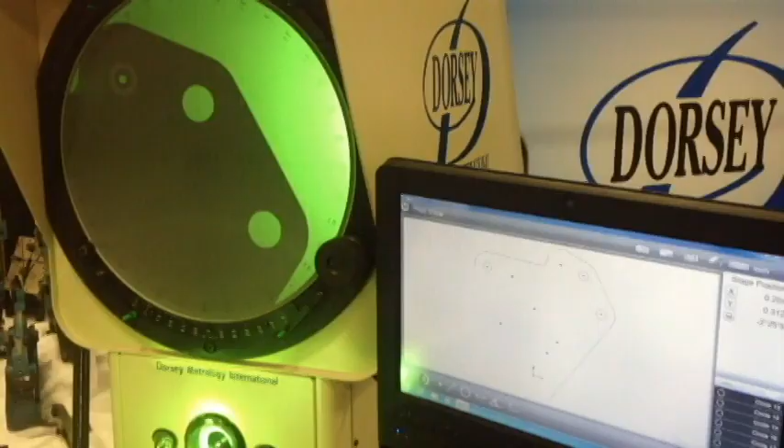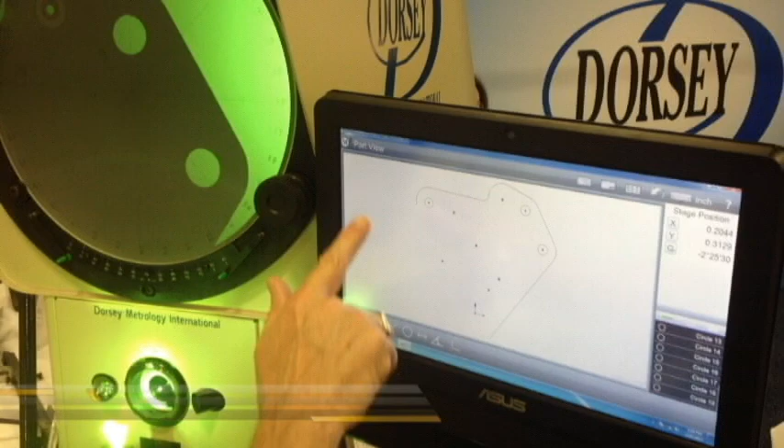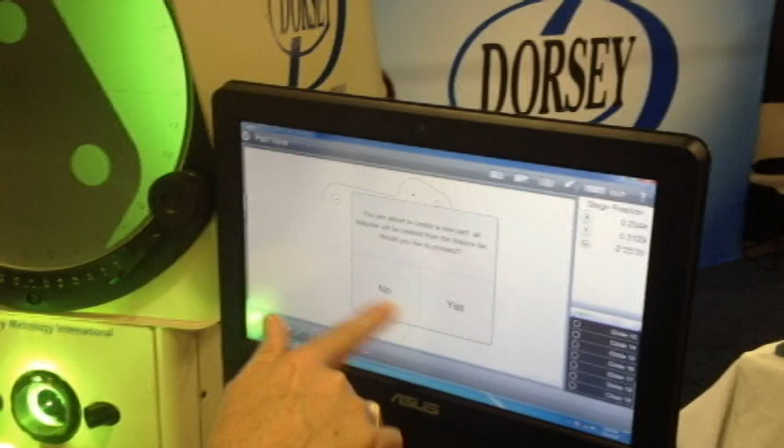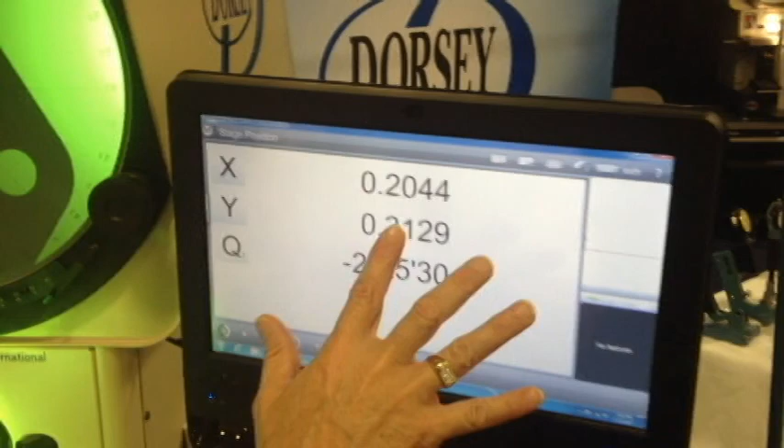Now, if you want to recalibrate for light and dark, there's a symbol at the bottom left-hand corner. You touch that, and you'll see an equals sign at the bottom of your selection. Hit that, and it says okay, place your edge sensor in the lighted area, then press ready or next when ready.

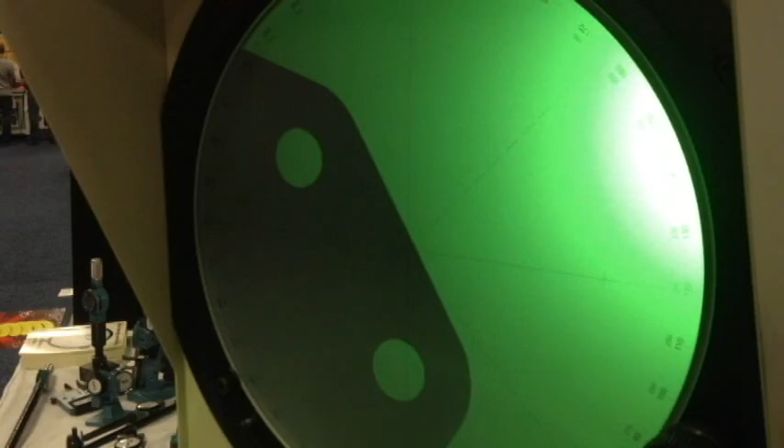So we move it over, put it in a lighted area, and say next on the computer. Okay, and then it says place the edge sensor in the dark area, then press next when ready. So we move it to the dark area and come back to the computer and say next. Then it says one more time, place the edge sensor in the lighted area again, and press next when ready. So we go back into the lighted area and say next one more time.

Okay, it's calibrated now, so now we're ready to measure.

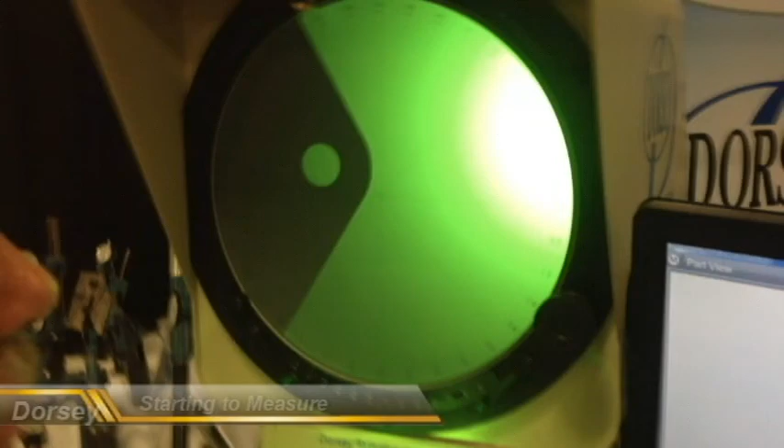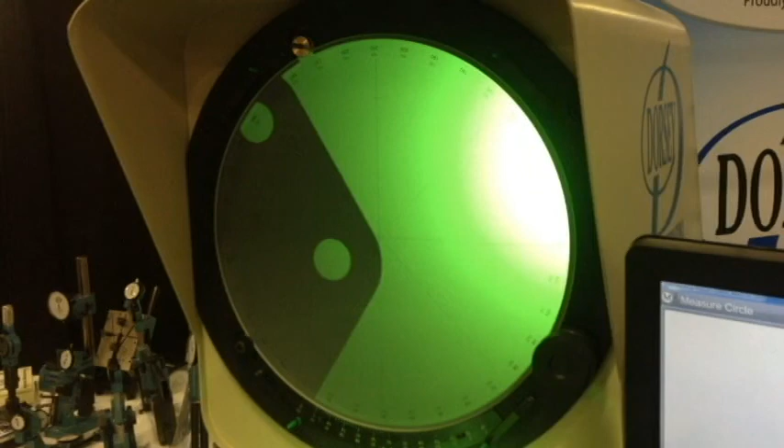In the software, you have the option of manual measurement, meaning you can tell the computer what you're wanting to measure. If I want to measure a circle, I hit circle, and it says start taking points. So now I just scan across my edge, as you can see, taking it to the tangent point. And I'm done, so I say done. And there's your circle.

Now let's say I didn't want a circle, I wanted a radius. I'll delete that since it's not what I wanted. So I come back down to where the symbol is, and you'll see a circle option and a radius option. I'm going to touch radius, and it says measure. So I come back up to the tangent point and start measuring points, getting close to the tangent but not into it, then come back over to the screen and say done. So there we have a radius now.

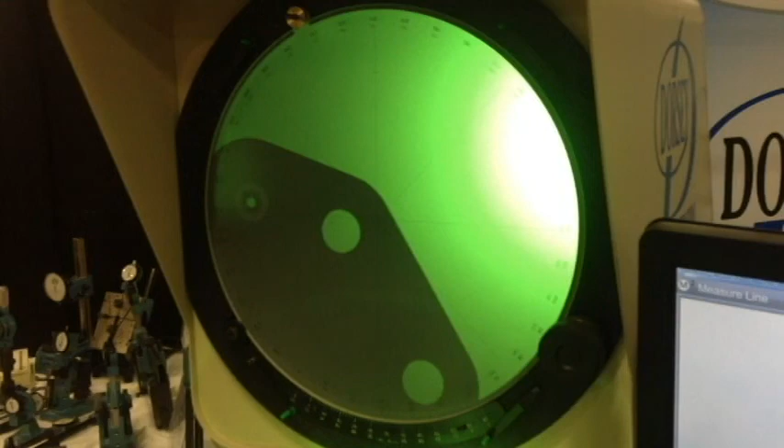Now doing that, it doesn't matter whether it's a line or whichever shape. For instance, I want to measure a line, so I tell it what I want by hitting line. Now I come across and start measuring points on this line, taking it up close to where the tangent's at, coming back across for another point, and now I say done. Okay, and now there's my line.

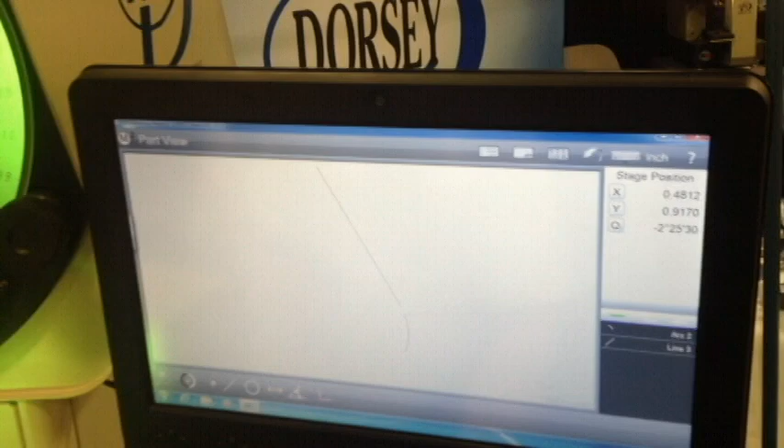Now let's say we've got another radius right there. So I go back down to where the circle is, and now I've got circle or radius options. I want a radius, so I touch it. Now I come back up to the screen and start measuring points on this radius, then come back over to the screen and say done. Alright, there's your partial radius.

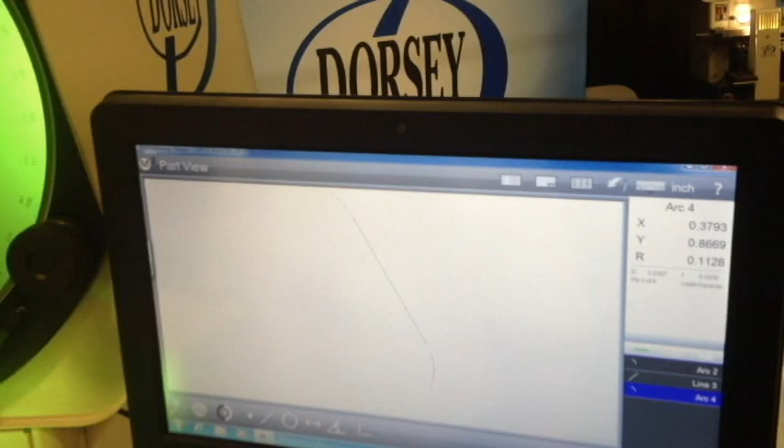And again, if you want to measure another line, just go to line. Start off where your line starts at and take a few points. You can measure more points if you want, but whenever you get done measuring a line, just tell it you're done. So there's the other line.

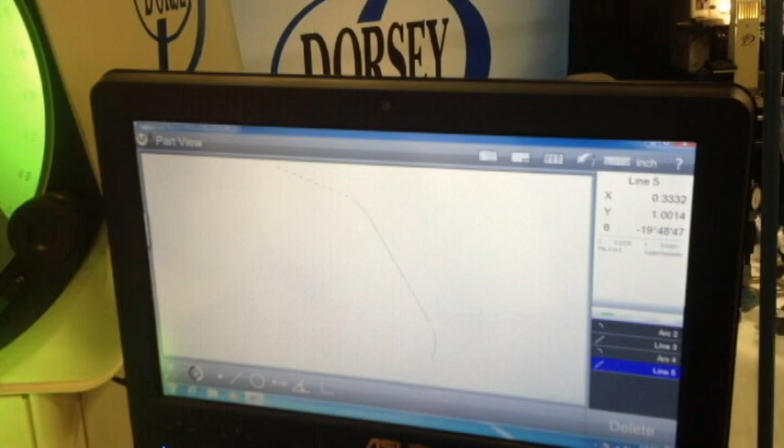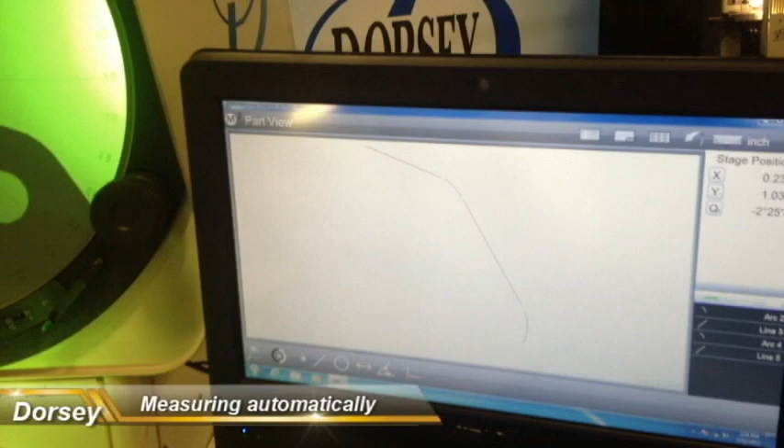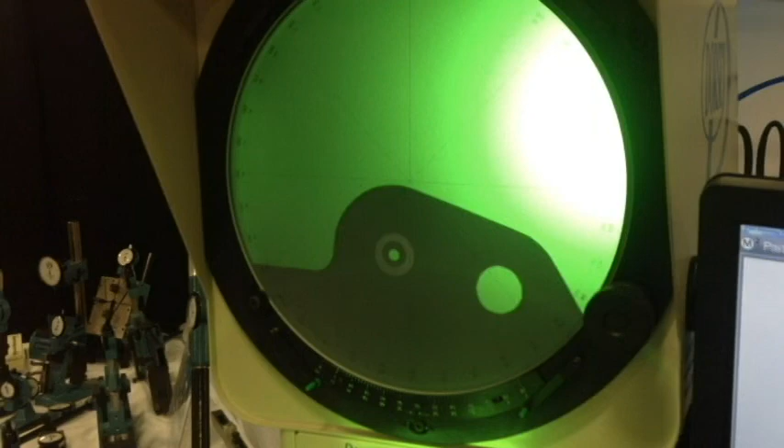Now, with all that being said, you also have the opportunity where you don't have to touch anything. You can just cross the same point twice and it'll automatically start taking points for you. For instance, I want to measure this radius, so if I bring the crosshairs down to go across the same spot twice, like so, now it comes up in yellow in the far right-hand corner.

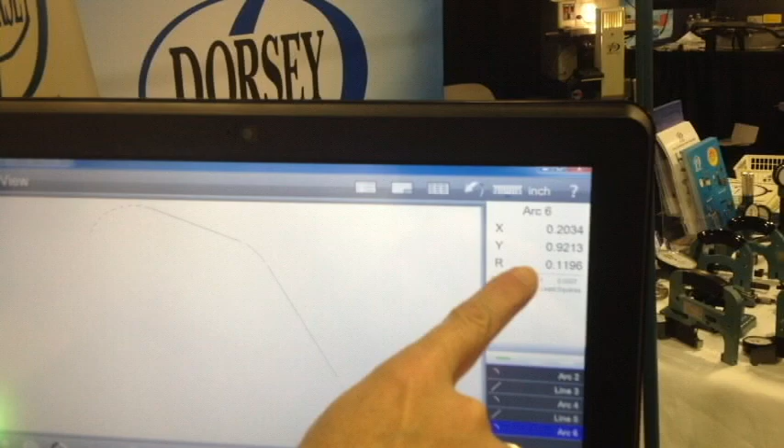Okay, I've already taken one point, so continue measuring. Now, on the comparator, I'll start scanning points. Whenever I want to stop, I get in a spot and do a double take again, and it automatically puts my radius up there, tells me my size, my location in the X and Y.

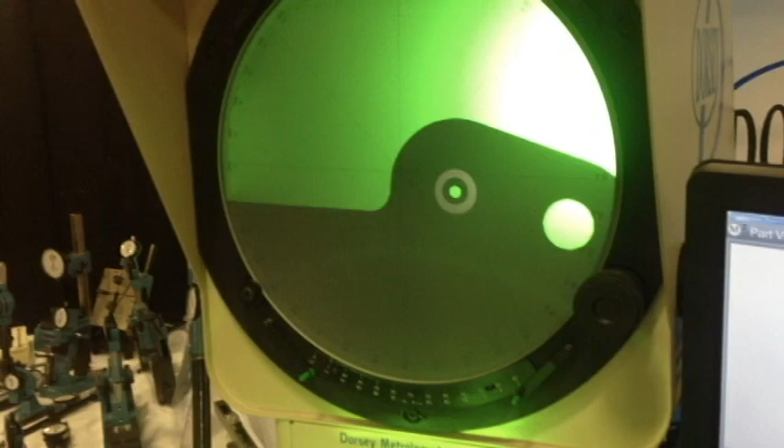Now let's say we want to measure a line. I go to this line and do a double take to get it started. The screen says I'm measuring again, so I measure another point on this line. I come across this line and take that point, there it is, that was the second point. Now I come back across that same point again, and it establishes that I'm done. So now you've got that line.

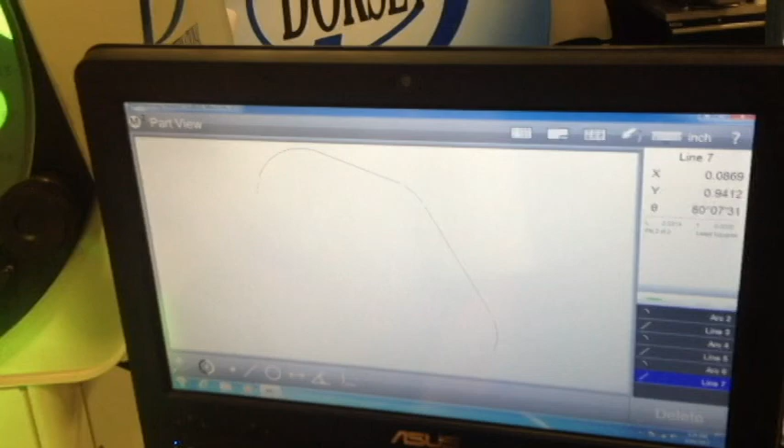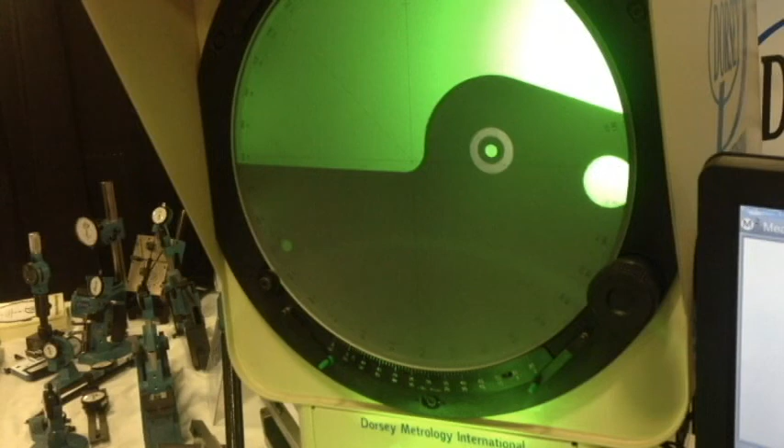Now we'll go a little bit faster. I'm going to do a double take on this radius, and you hear it taking points. Now I can just go across this radius, and where I want to stop, I do a double take right there. It finishes my radius out and also tells me the location and radius size.

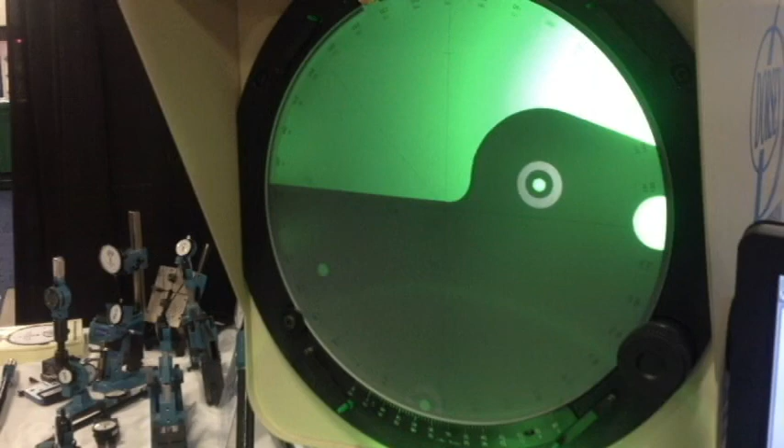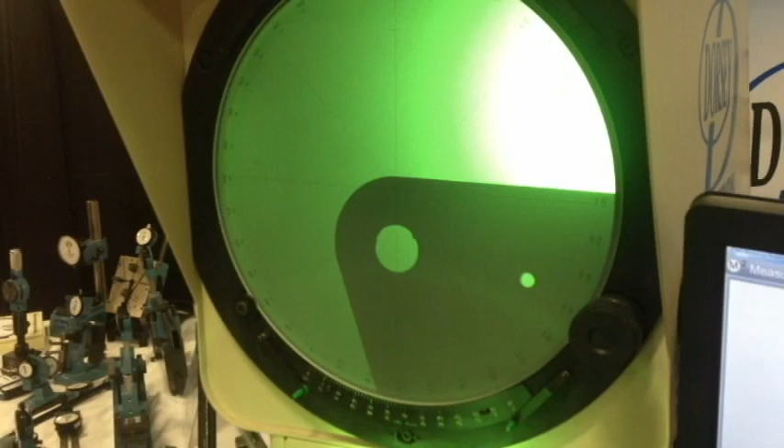Now I want to go back and start another line, so I do a double take. It took a point, so I go over here and take another point. As I do this double take, it's not only taking a point, but also ending and starting a feature. In this case, the double take is going to end, and your line is finished now.

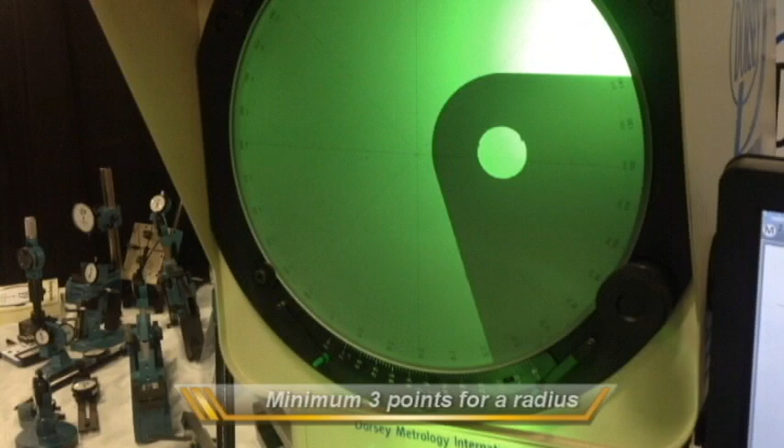Now I want to go back to the radius again, do a double take, and now it's taking points. I can scan my radius, and again, you've got to have a minimum of 3 points on a radius, but you can measure as many points as you want. Now we do another double take, and there's your radius, finished.

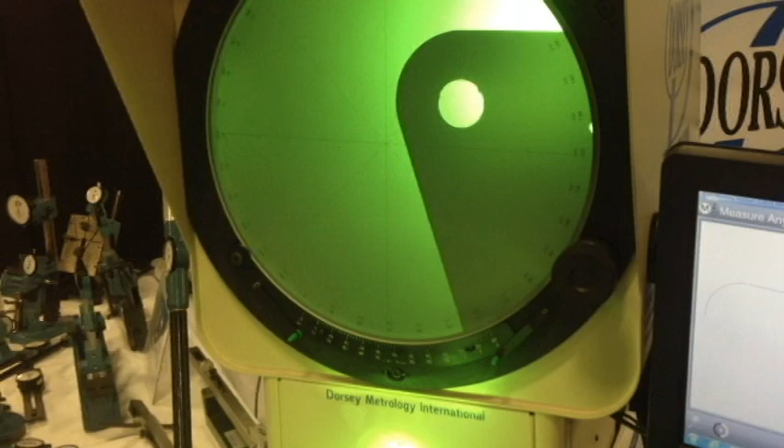We're going to do another double take to start a line. Got the single point already entered, now we'll scroll down. You've got a little transition right here where two lines meet at an angle, so I'm going to stop at that tangent point and do a double take. It enters my last point, creates my line. Now I'll do another line, so I just move the crosshairs down a little below that tangent, double take again, scroll down, and we'll stop right here with another double take. So there's that line, as you can see.

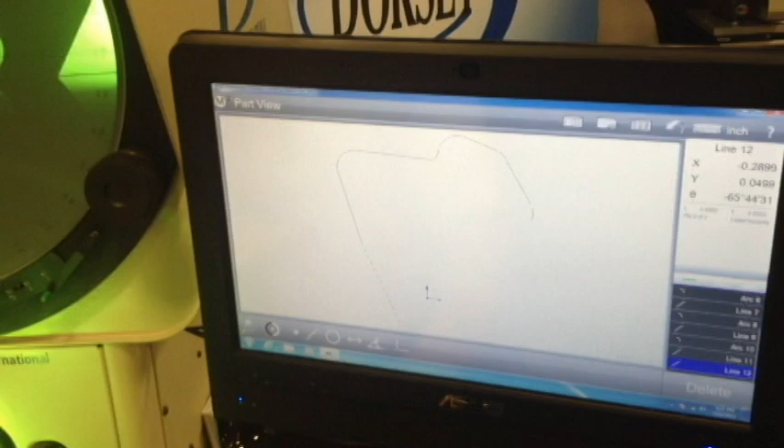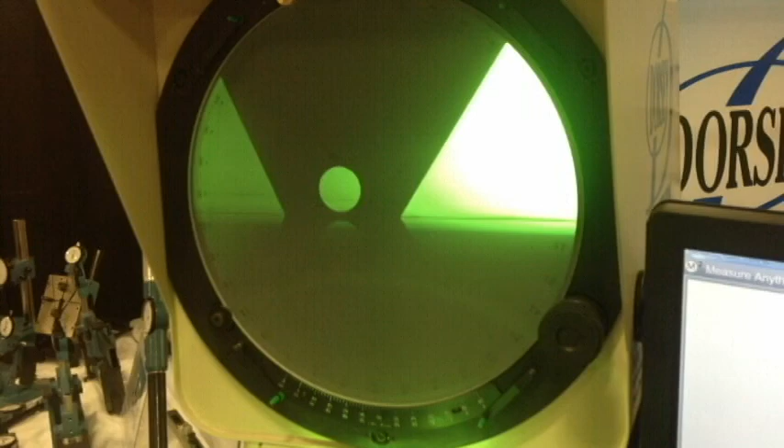Now, since I'm here, I might as well do this circle too. We're going to do a double take, and then start to take points. Now I can just go across the edge, and it automatically takes my points for me. Double take, and it's done.

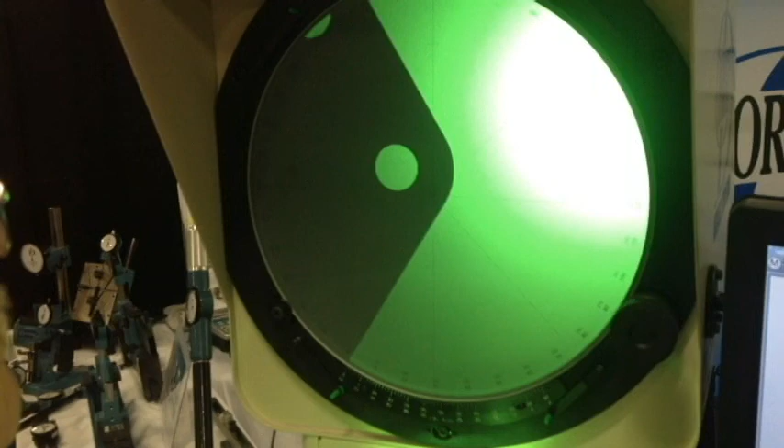There's your circle. I want to do another line over here, so I do a double take, then scroll up to where I want to put another point, a little bit of a ways up here. We get right close to the tangent, come over and do another double take, boom, boom, and now you've got this line.

Now you've got pretty much the full peripheral image of your part, but we want to measure some holes now. So we go up here and do a double take. It registers your point over here, you see point 1. Now we finish taking other points on the circle - cross, cross, double take, and it's finished, and there's that hole.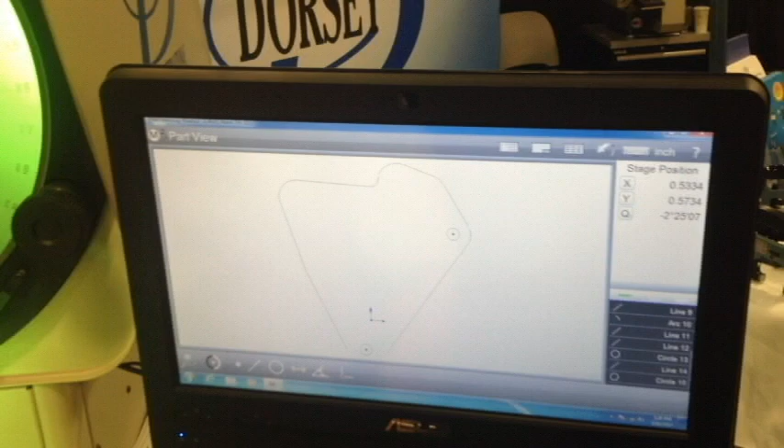Now come up to the other hole here next to the top. Same thing, double take to get you started. Cross to the dark and light, double take, dark and light, ends it up, and there's your other hole.

There's another hole right here, so we do a little quick double take right there. Cross, cross, double take. There's that hole. Kind of small. All right.

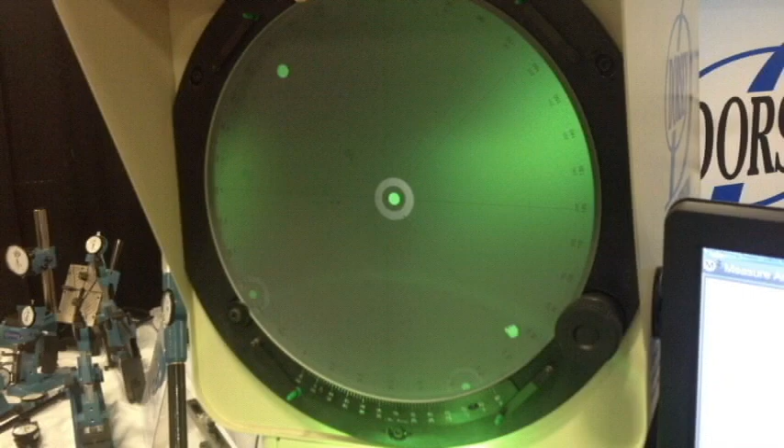We got another little hole right here. Just to focus a little bit, come over, do a double take, cross, cross, double take. Okay, there's that hole.

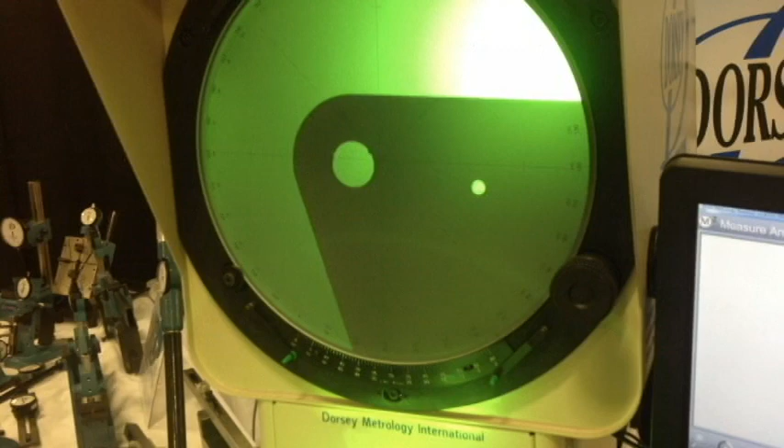Okay, and we go up here. Here's a big hole right here. Just to focus a little bit more. Double take to get started. Cross, cross, double take the end, and there's that hole.

Let's see, we got a hole right here. Double take, get started. Cross, cross, double take. Okay.

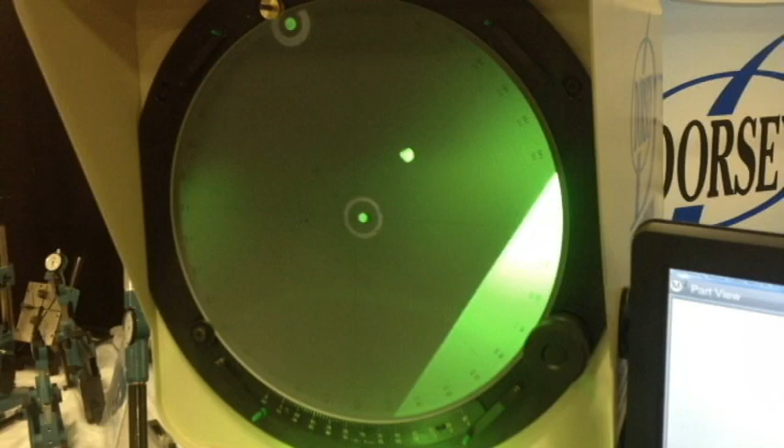Got one right here. I'd like to measure this. It might be coming in handy here in a few minutes when I'll show you a few other things. Double take. Cross, cross, double take. Okay.

Now, on the image, you'll see there's other holes on there too, but rather than measuring every single hole on this part, this kind of gives you an idea.

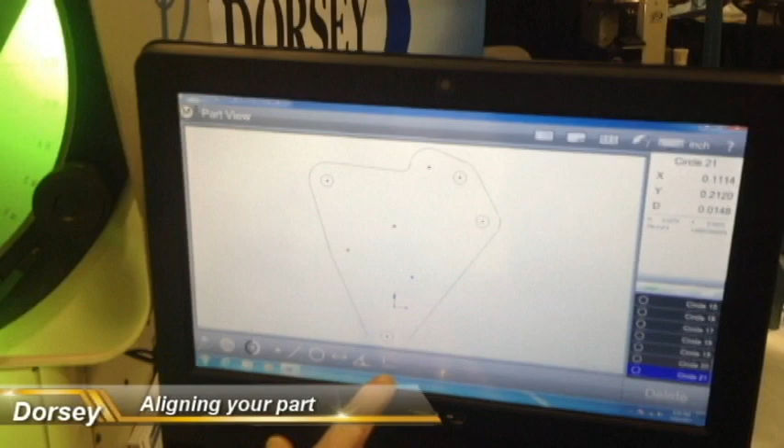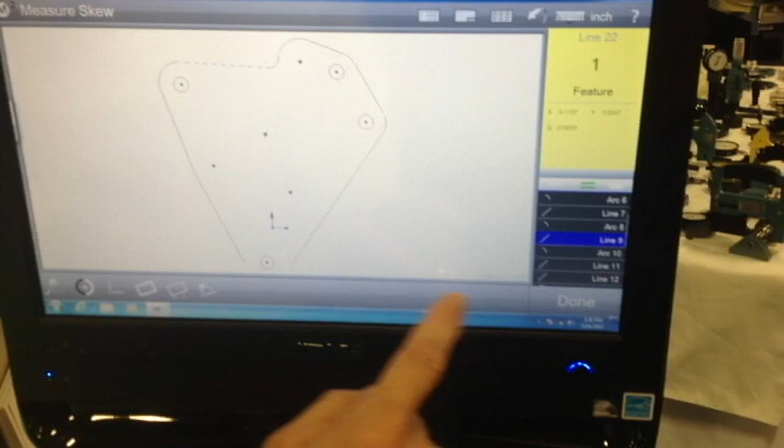Now, we want to align the part. You've got an icon down here that looks like a little square, and that's where you do your coordinate system. So we're going to touch that, and I want to square it, I want to align it. So the symbol that looks like a cockeyed square, I'm going to touch that because I want to square the part up. Now I'm going to touch the line that I want to use to square it, and I'm going to say done. And now it has oriented the part straight. It also set my origin into Y.

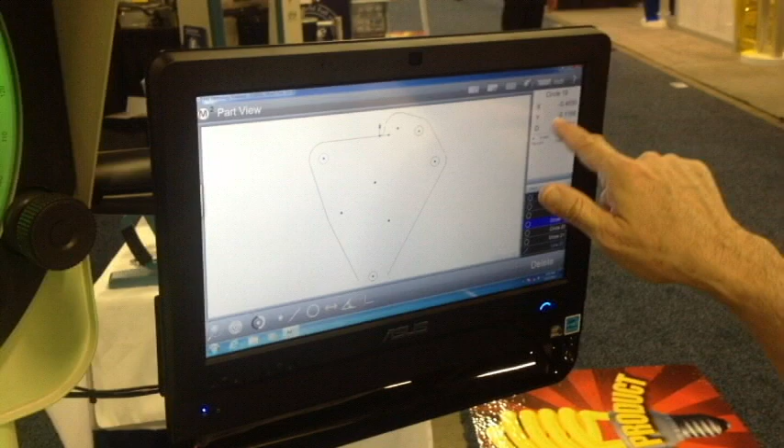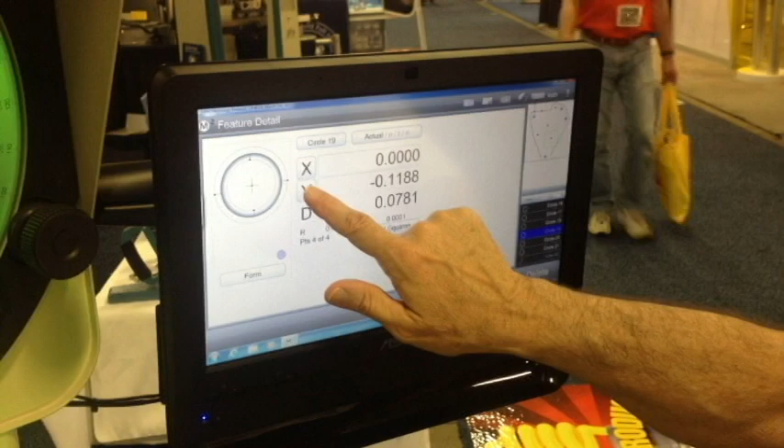You ready? So here, if you want to use the hole, just come over and touch the hole, and there it is. You get your X, Y, your diameter. I want to make a zero out of that, so I'm going to touch it. It comes over here. Now I want to zero out in the X, touch it, zero out in the Y, touch it, and say done. So now your zero is at the center of the hole. So anything you touch now will give you location in relationship to that coordinate system.

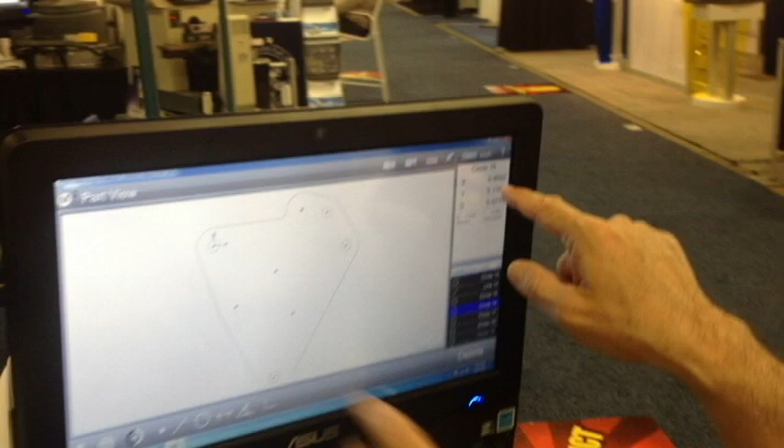If I touch this hole, it says that in relationship to your zero over here, in the X, that circle is 809 thousandths and 2 tenths in the X. In the Y, up and down, it's 0.1197, 119 thousandths and 7 tenths in the Y up and down.

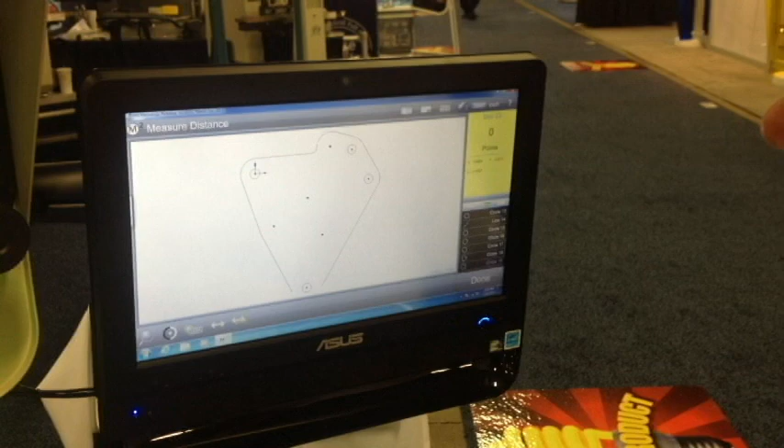Now let's say you want to know a distance between two elements. So you come down here and say distance, it looks like a little line with an arrow on each end. You want to touch that, so that's what you want to know. Now you're going to just highlight, for instance, I want to know the distance between that circle and this circle, and say done. Your straight line distance is 1.0047.

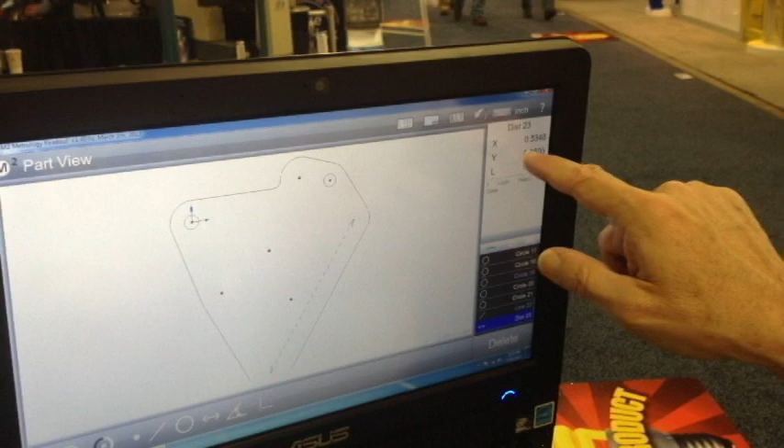Now, the holes in relationship to each other is what the X and Y representation is. In the X, the holes are offset by 534 thousandths and 8 tenths. In the Y, they're offset by 850 thousandths and 5 tenths. And of course, again, the straight line distance is 1 inch, 0.0047.

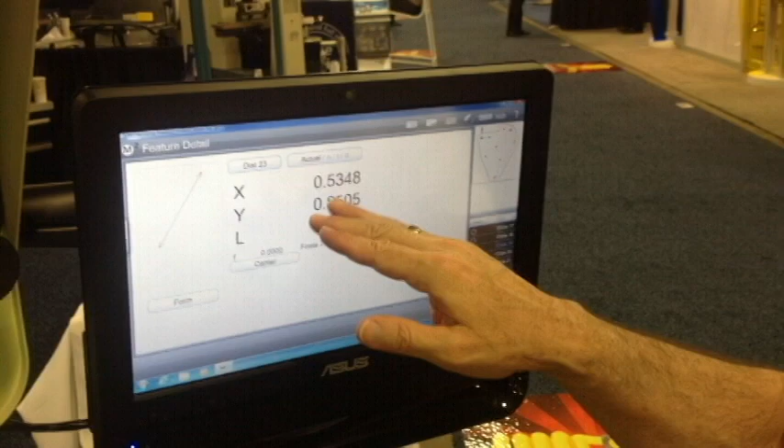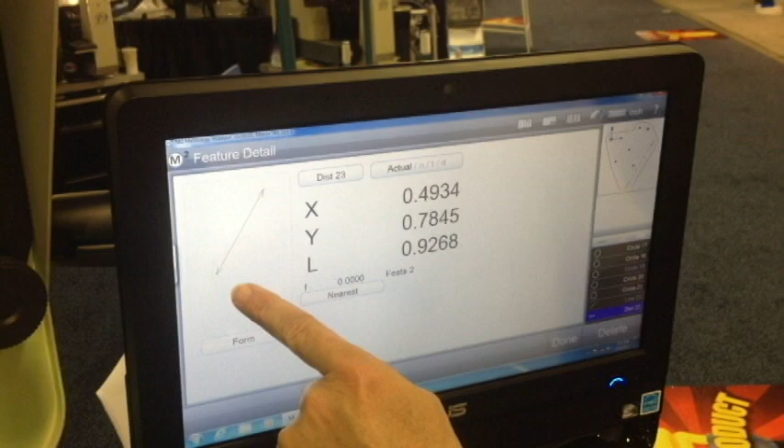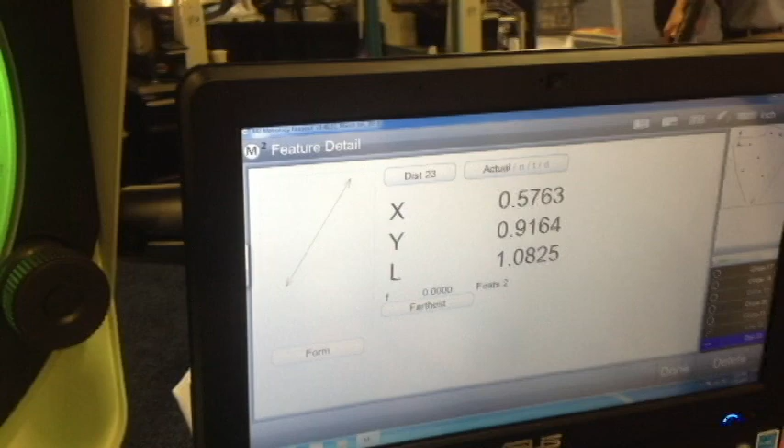Now, one thing about this is that I can also touch this and bring the data over. It shows you that hole location and everything. But you also have a remark down there which says center. Well, I want to know what the nearest is for the holes, which is actually an arrow drawn to the inside wall of the holes. I may also want to know what the farthest is. So I touch again, and now it shows me what my farthest illustration is from the holes, from outside to outside. So now if I'm done with that, I just say done.

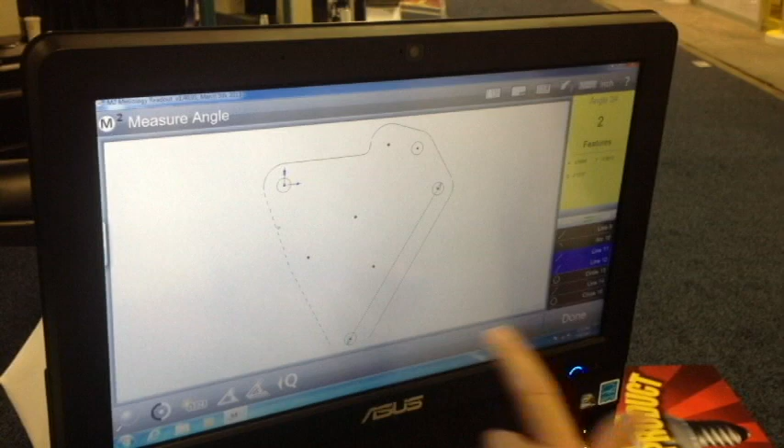Now let's say you want to measure an angle between two lines. You come down where the illustration shows the angle symbol, and you're going to touch that. Now I want to pick out my two lines I want to use. Let's say I want to know the angle between this line and this line, and I say done. That is 171 degrees, 51 minutes, and 19 seconds.

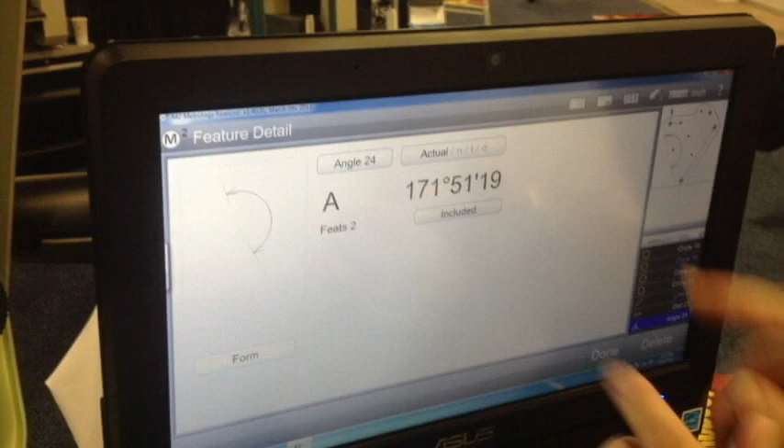Well, all angles have 4 quadrants to it. So now I'm going to touch this, and bring it over to where it's over here now. This right here, the 171 degrees, 51 minutes, 19 seconds, is the included angle. Well, I may want to know what 180 plus is, and you'll see the illustration show you where the angles are actually coming from. It'll show you the illustration, how everything is coming out.

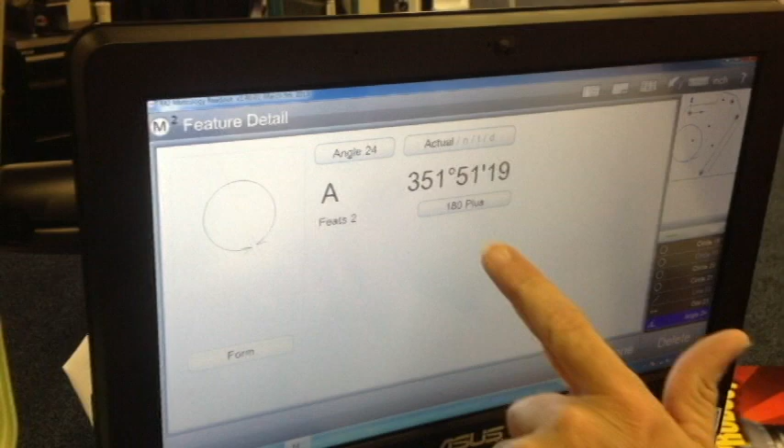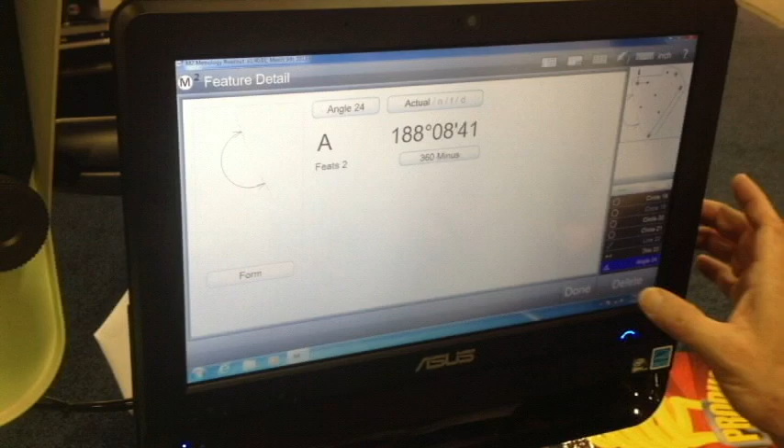And you also have 360 degrees minus, and again it gives you an illustration. So now you have all 4 quadrants. Say done.

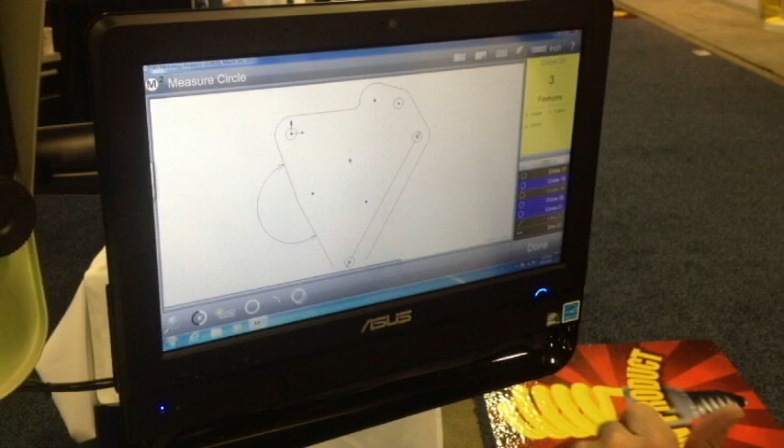Let's say you have a bolt hole pattern and you need to know what the diameter is. So what you do, the key word is you want to create a circle. You go to the circle icon, looks like a circle, and touch it. Then you touch off the 3 elements, or however many elements you want to select. After you select every one you want, come over here and say done. Okay, now it draws out your diameter and gives you the diameter, which is 443 thousandths and 1/10. It also gives you the X and Y location in regards to your 0 point, which is the center of that hole.

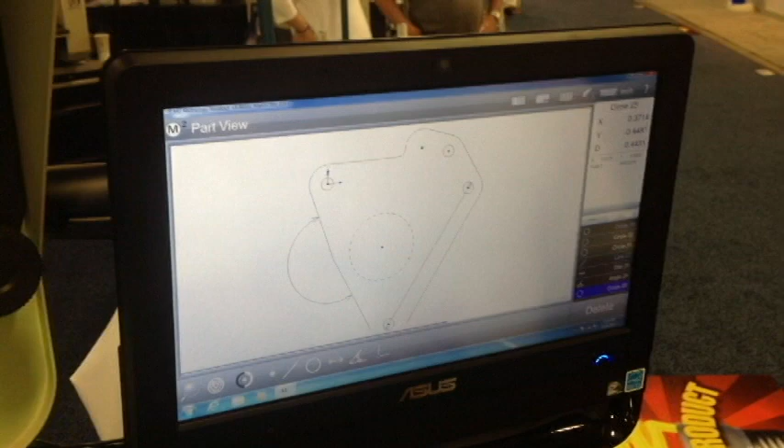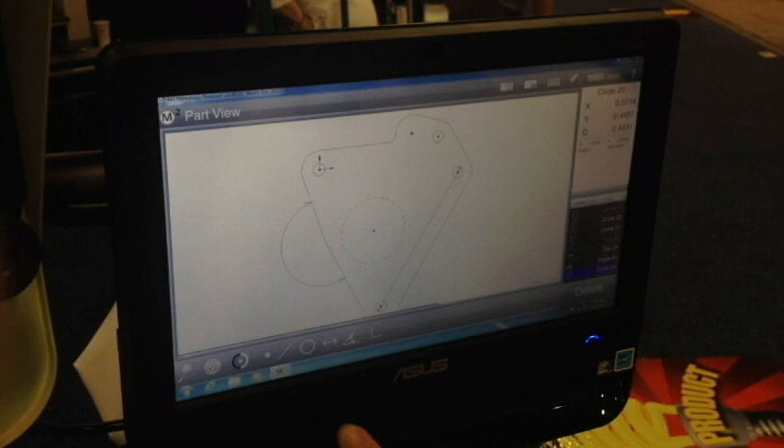Now let's say you want to create tangent points in space, where a tangent point is created by where a line meets a radius. Just to give you an idea, we want to create a tangent point where this line and this radius meet. So the key word is we want to create a point. We're going to go down and say point, because that's what we want to create. Then we use this line, we use that radius, and we say done. There's your tangent point.

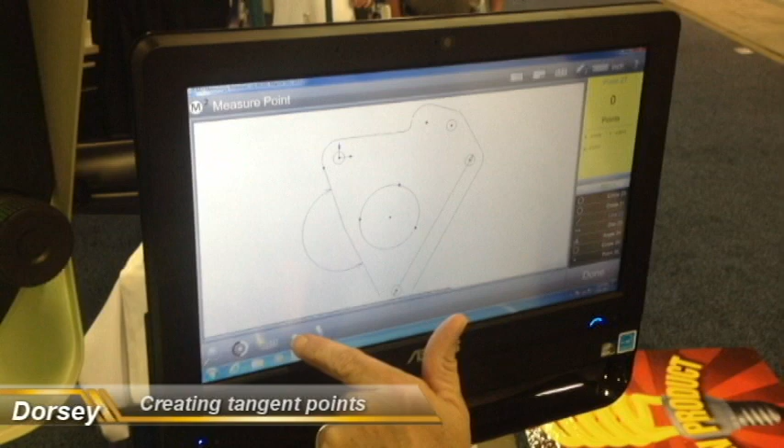So if I want to create another point for another tangent point up here on this same radius and this line, I get my tangent point, which I did - point, touch off on the radius, touch off on that line, and say done. Now I have my 2 tangent points.

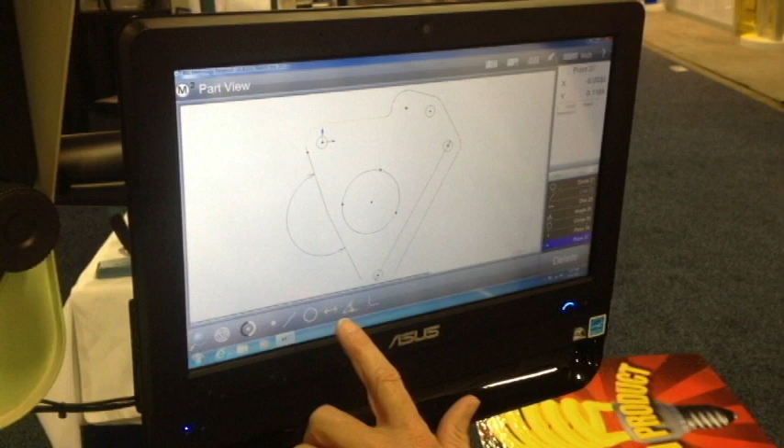Now let's say I want to know what the chord length on the radius is - it's a distance. So I come down here to the icon with the arrow, the line with the arrow on each end, and I touch that. That's the distance symbol. I want to touch the 2 dots. My finger's a little big, so I'll come over here and touch them on the screen. I highlight the 2 that I want, and say done. As you can see the little flashing line, which gives me that distance.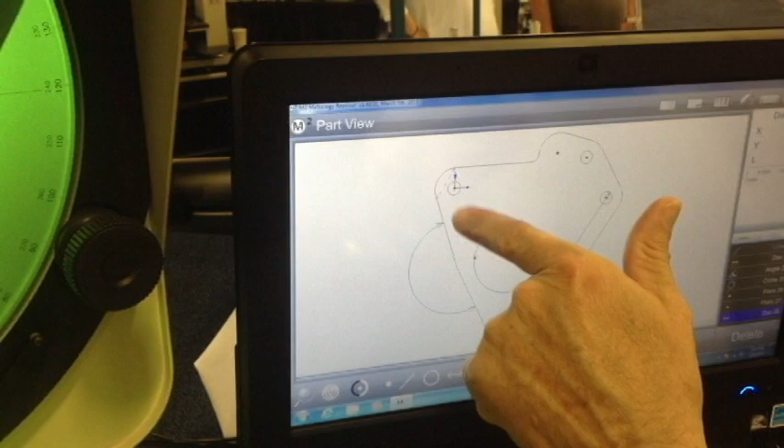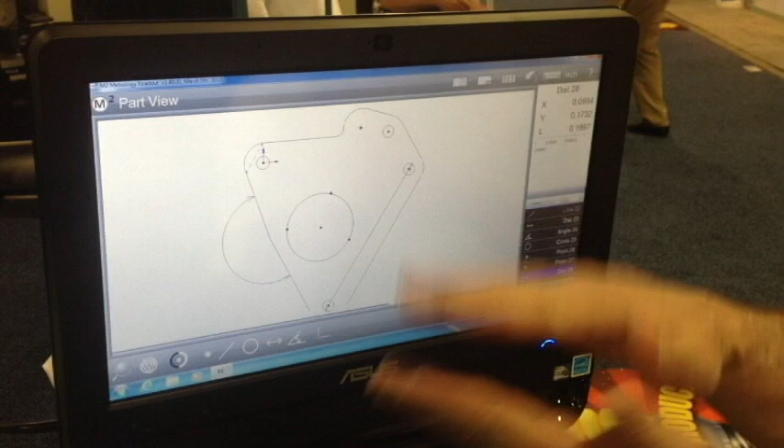Over here it tells you that straight line distance is 199 thousandths and 7/10. And the 2 tangent points in relationship to each other, in the X, are 99 thousandths and 4/10 from each other. And in the Y, up and down, they're 173 thousandths and 2/10 from one another.

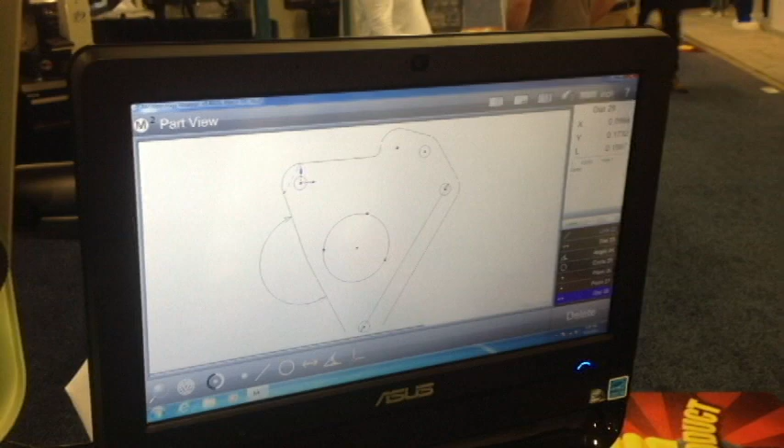We've pretty much gone over the general information for learning the software, because everything else works in the same sequence. Again, if you need to know a distance between items, no matter what it is, just go down to distance, touch it, pick up the 2 points you're wanting to know, and say done. There's your straight line distance again, 191 thousandths and 1/10, and again in relationship to each other in the X and Y.

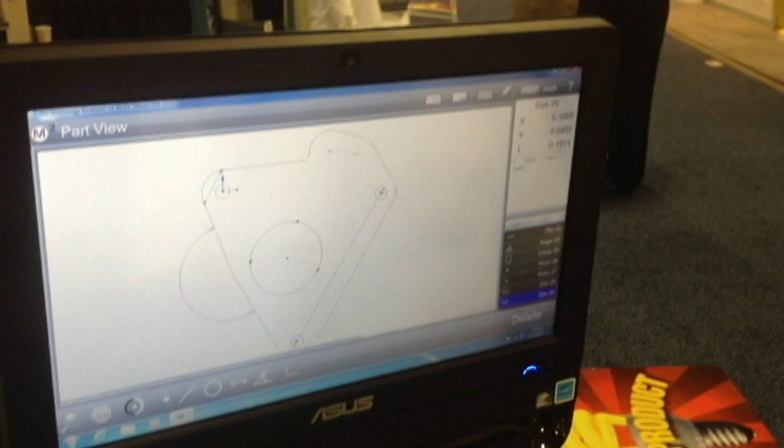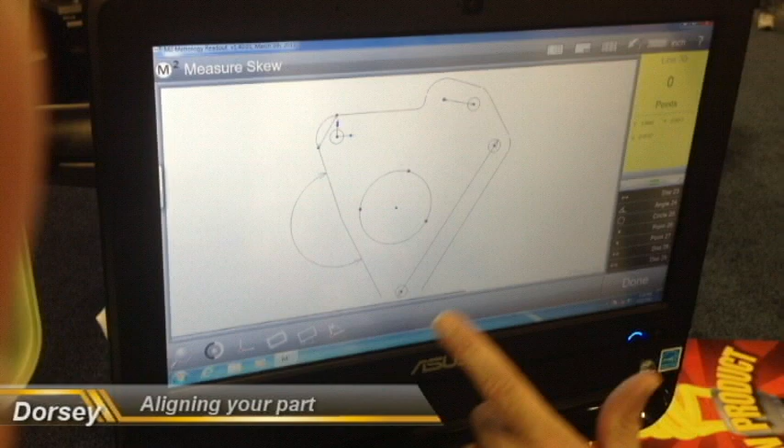Also, let's say you want to rotate or align by another surface, because you can do orientations anytime during the program. So if we go back down to where the alignments are and say I want to align, I want to square this up by another surface, I touch that. Let's say I want to use this line now, and I say done. So now the image is squared by that line.

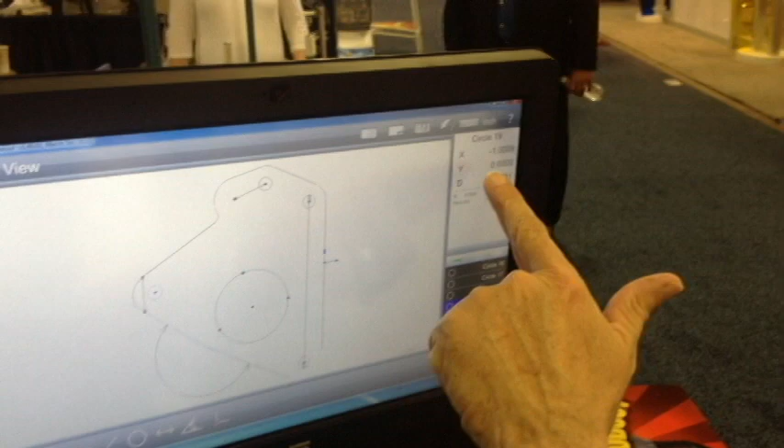This application can be applied anytime during the program or whenever you're measuring a part. You can also set origins anytime you want. If you want to set an origin, let's say in this circle right here, just touch the circle, touch the circle again, touch the circle. Come up here, touch it, pull it over, and say 0 in the X. Of course it's already zeroed in the Y. You say done, and now your coordinate system is back in that hole.

So the software is very simple to use, just by following the procedures I just showed you.